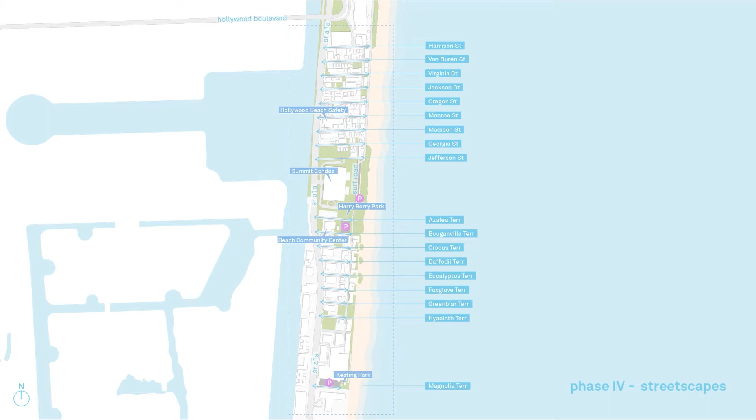As part of our redevelopment process, community members can expect to see various upgrades along their respective streets. Here are the improvements coming soon to all 18 streets included in this phase.

In Phase 4, the soon-to-be renovated streets will be similar to the 33 streets that have been completed in our previous phases. The amount of public parking available on the street will be maximized while preserving as many existing parking spaces as possible. Newly constructed, safe, and accessible sidewalks will be built.

Both roadways and sidewalks will be newly paved. We will strengthen the utility system by undergrounding unsightly overhead utilities, which will also minimize disruptions during storm events. This will be made possible by the installation of utility transformers strategically located on landscaped islands.

New native landscaped islands will be implemented on all streets, providing shade for pedestrians and contributing to the beautification of all roadways. Moving forward, we will be utilizing a new type of marine turtle-friendly lighting as seen on the previously completed streetscape phases.

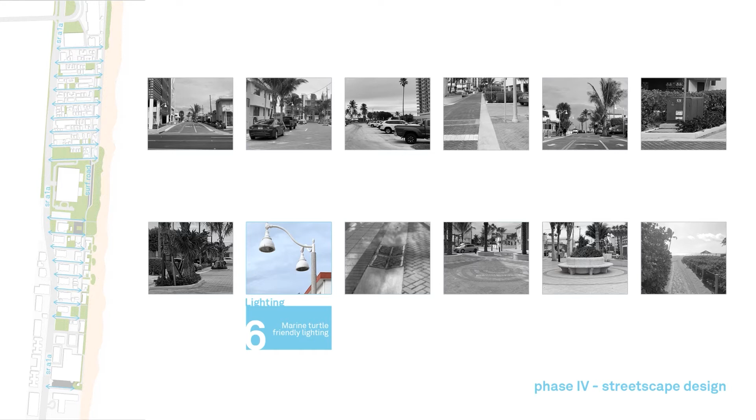Drainage upgrades and system improvements on the east-west streets will be made in coordination with the Florida Department of Transportation. And finally, we will be enhancing the street end conditions to preserve parking spaces while updating the pavement and landscaping. These new street end conditions will act as public plazas and will create a seamless transition from the street end into the Hollywood Broadwalk.

Existing streets are characterized by unsightly overhead utility lines which are susceptible to being downed in the event of a bad storm. A lack of organized landscape, as well as old and cracked sidewalks along the street, will be addressed in the upcoming redevelopment project.

Lastly, public parking spaces will be updated to ensure issues of encroachment into the roadways no longer occur.

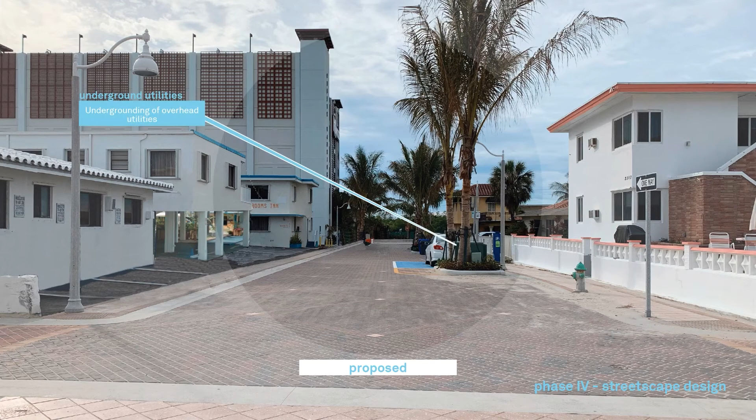In our proposal, all of the previously overhead utilities have now been placed underground. Both sidewalks and roads are newly constructed and have been upgraded with new paving. The utilization of marine turtle-friendly lighting has been applied throughout the street.

We've also maximized the availability of public parking along the street and have preserved as many existing parking spaces as possible. A new landscape has been incorporated onto the blocks as much as possible. The photo currently on the screen demonstrates a street completed in Phase 3 and is meant to illustrate the upcoming changes in Phase 4.

In addition to these changes, the street end plazas will be upgraded to have paved mosaic artwork on the ground and will seamlessly incorporate brand new landscaping.

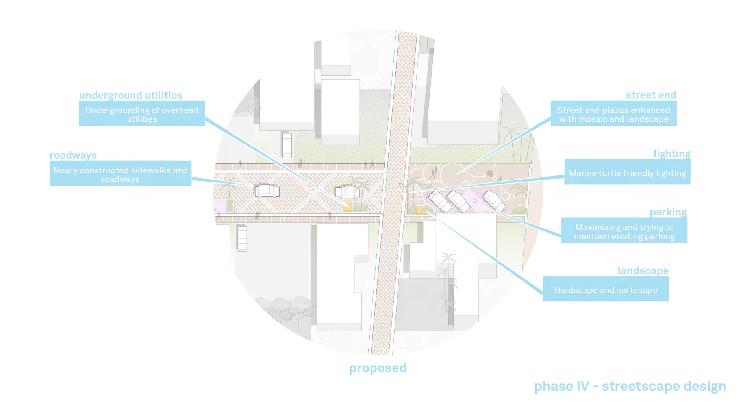Over the past year, we've met with the community who have expressed the desire to maintain the existing single-lane two-way traffic configuration along their streets. Since then, we've been working with Broward County as well as traffic engineering consultants on the approval of maintaining this street configuration on all streets included in Phase 4.

Two-way traffic is desirable because it improves circulation during flooding, provides pedestrian safety due to slower traffic circulation, and limits traffic on Surf Road, among other benefits.

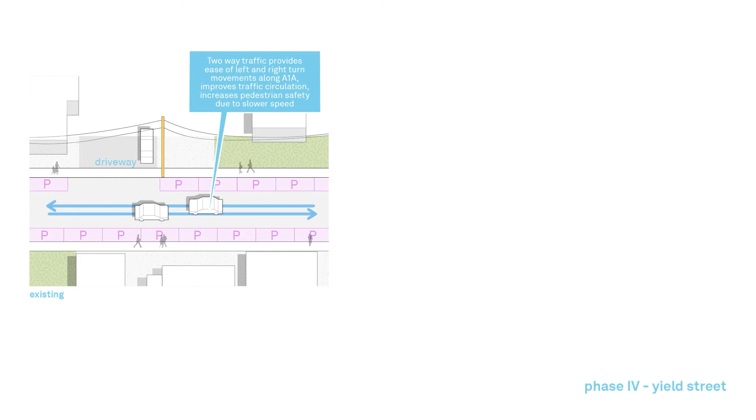The only difference between what you have there today and what is being proposed would be the incorporation of dedicated yield spaces.

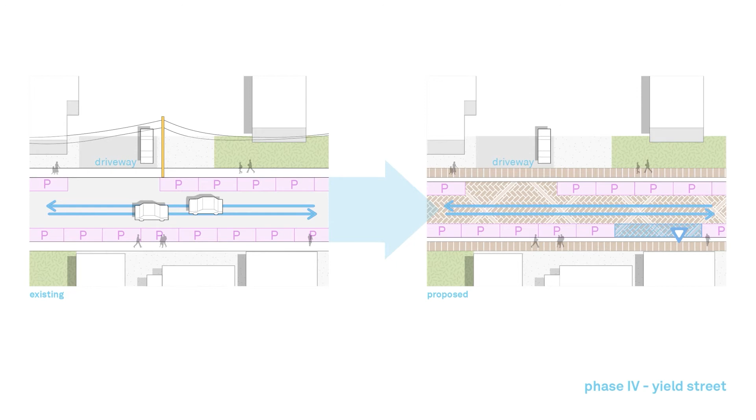Currently, there are natural yield spaces along the street. Examples of natural yield spaces are driveways or entrances into private property. These areas allow cars, including emergency vehicles, to pull off to the side and allow others to pass.

However, we understand that not all streets have the frequency of natural yield spaces necessary to fit Broward County standards. To address this issue, we will be implementing dedicated yield spaces throughout those streets.

Dedicated yield spaces, as shown in the diagram on the right, will be clearly marked on the ground and will allow vehicles to yield to oncoming traffic. Please note that parking on these dedicated yield spaces will not be permitted. It is anticipated that no more than 3 dedicated yield spaces will be needed along the project corridor.

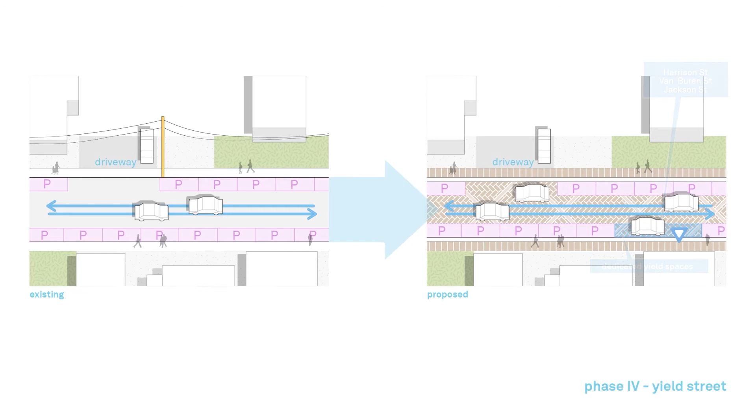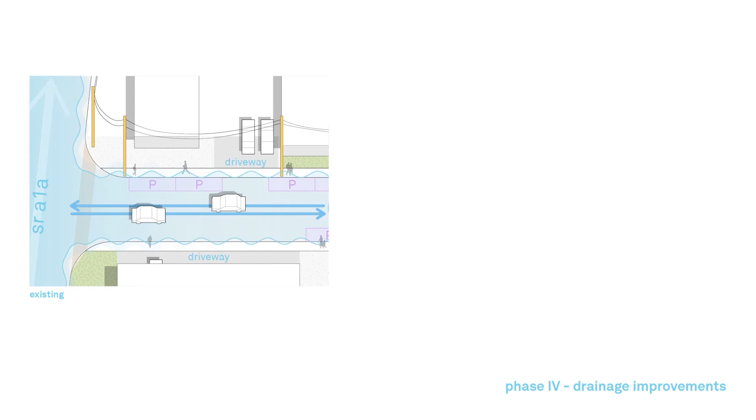The city's drainage system is interconnected with Florida Department of Transportation drainage and intracoastal outflows. The CRA is working with the Department of Transportation and the City of Hollywood Public Utilities to lessen the existing conditions.

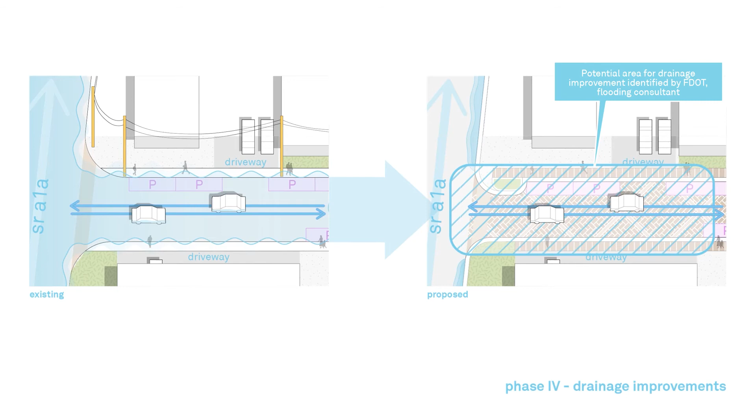In this particular phase, we are planning on maximizing and maintaining as much public parking on the street ends as possible, and when appropriate, providing public street end plazas.

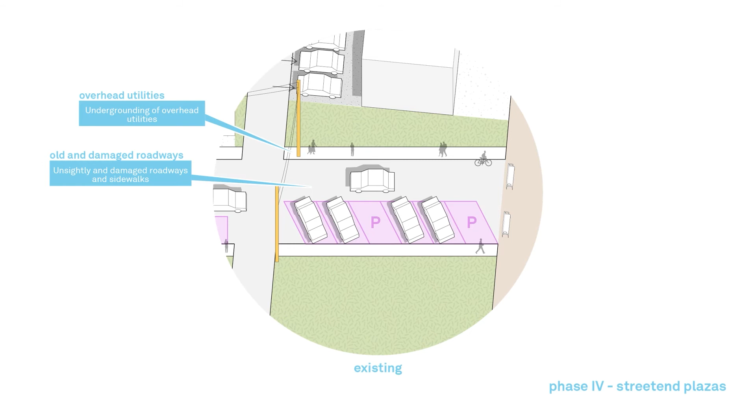Currently, the street end conditions do not offer a smooth transition onto the historic Hollywood Broadwalk. With the lack of landscape on the site and overhead utility lines populating the sky, the street end does not act as an inviting public space.

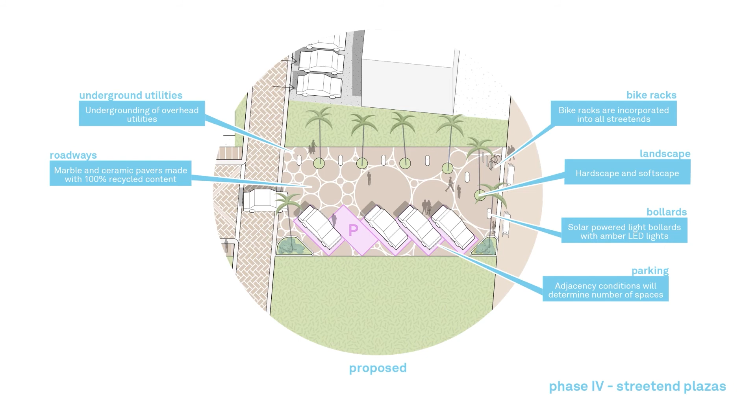In the proposed street end plazas, we will incorporate brand new street paving, bike racks, solar-powered bollards, landscape, and underground utilities, all while maximizing the amount of public parking available on those streets. To give you a better idea of what to expect on each street end, we've prepared a series of drawings to explain the 4 scenarios expected to take place in Phase 4.

Some street ends have adjacency conditions where there are driveways or private parking on site. Streets with these adjacency conditions will be designed to maintain access to these driveways and parking spaces while providing a plaza for the public.

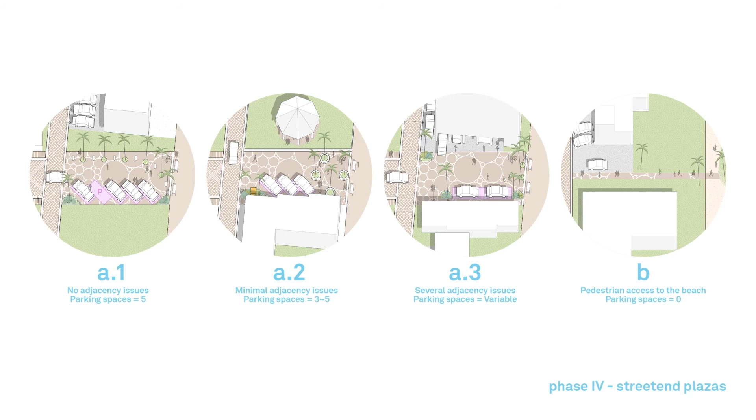Scenario A1 demonstrates a street end with no adjacency conditions. This allows us to provide a maximum of 5 parking spaces. This street end condition will also have a public plaza.

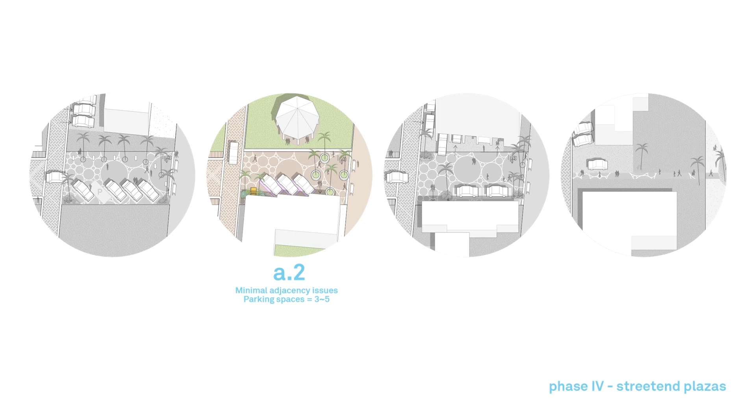Scenario A2 includes streets with minimal adjacency conditions. We expect to provide 3 to 5 parking spaces on these street ends as well as a public plaza.

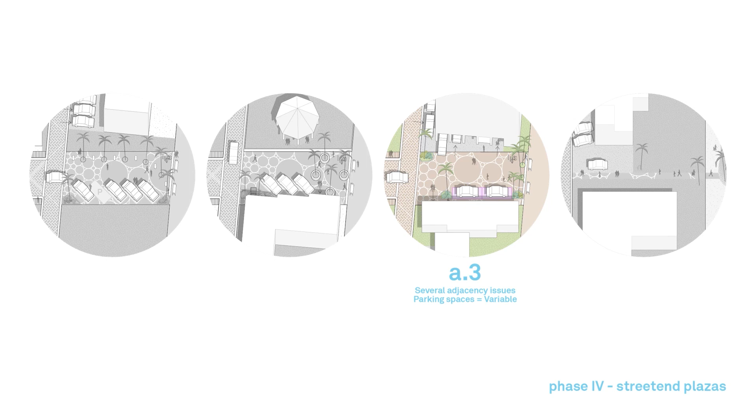Scenario A3 includes streets with several adjacency conditions, such as entrances into driveways and private parking already on the street end. The amount of public parking, therefore, will vary. However, just like the previous scenarios, these street ends will also incorporate a public plaza.

Scenario B, our final scenario, includes streets that have direct access onto the beach via a dune crossover. These dune crossovers will be upgraded to include brand new paving, seating, and landscape.

The next segment of the presentation illustrates each customized street based on existing conditions.